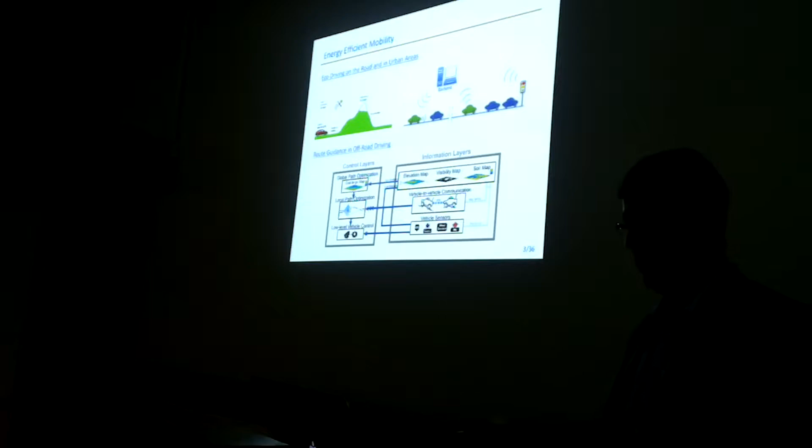But today I'm going to focus mostly on traffic signals and how that information can help us improve energy efficiency of vehicles. Now, this is traffic in LA last year, I think. And if you have the most efficient vehicle automated in that traffic, it's not going to help you. You're going to lose fuel, you're going to be frustrated and lose time. So to improve on energy efficiency, we need to think outside of the car.

We need to think about the system, because even with autonomy, there are some good arguments that say if your car is autonomous, your vehicle miles traveled may increase, the user group may increase, and the congestion problem may be even more. So we need to have the right policies to avoid those kinds of scenarios, and I'm not a policy person. But the other thing we can do is to coordinate the motion of cars with infrastructure and with each other. My focus is energy efficiency, but also to make congestion less. For example, one opportunity that exists is in traffic lights.

The National Traffic Signal Report Card that comes out every once in a while, the 2012 one, gave almost a failing grade to most of the things that are done about traffic lights in the US: management, traffic signal operations, signal timing practices, and traffic monitoring and data collection got an F grade. So we have a lot of room for improvement. Delays at traffic signals add 5 to 10% to all traffic delay, or 295 million vehicle hours of delay, according to the reference that was on the previous page. And the benefit to cost ratio of traffic signal management exceeds 40 to 1.

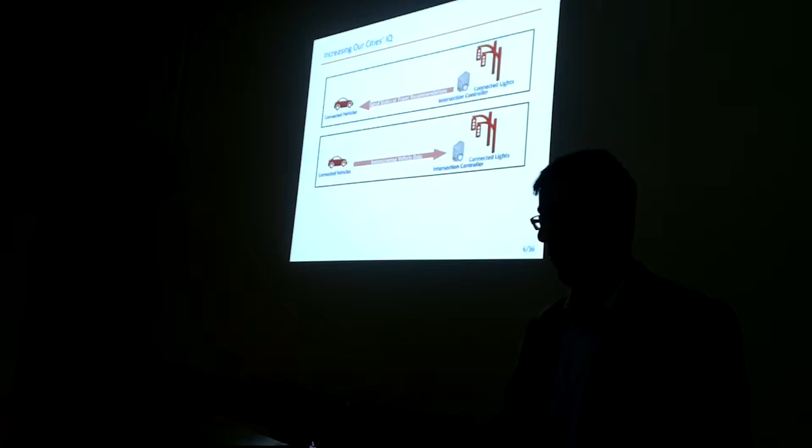So with that in mind, over the past few years, we have looked at transmitting information about the signal phase and timing to connected cars to help them drive more energy efficiently. We've also looked at how information from connected cars sent to the traffic signal or the traffic management system can help us improve the flow of traffic. Ideally, when there's two-way communication, you can do even better. And in a very ideal scenario where all cars are autonomous, very futuristically, you may not even need traffic lights. The first and the third topic I'm going to talk about today.

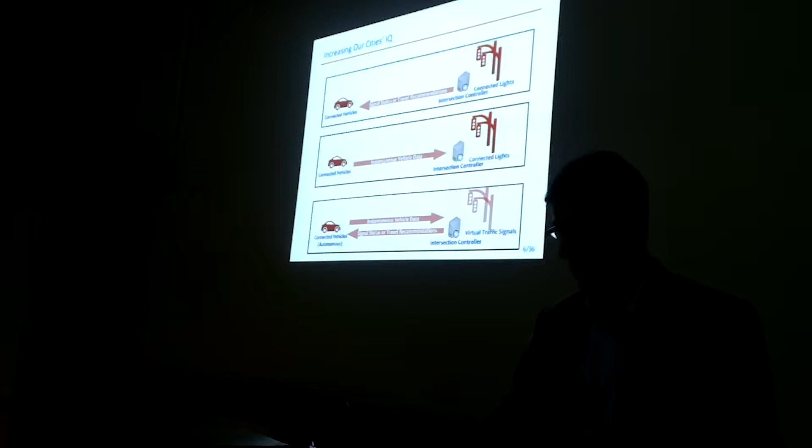So back in 2008 or 9, I had a master's student who was going to write a thesis, and I was trying to come up with a simple problem that I could solve in 1 year. And I didn't know that it's going to continue to become one of my core research areas.

And that was, I told the student, let's say you're going down the street, and there are 3 traffic lights. And you know where the traffic lights are, and you know when they're going to be red and green. So the x-axis is time. So as a function of time, we know when these lights are going to be red and green. We know that idling behind the light is not good for energy efficiency, so we want to find a trajectory that minimizes your idling times.

Now, this could be a simple rule-based approach if you just look at the first light ahead of you. If you look at multiple lights, you can get a better solution if you use an optimization-based approach or an optimal control approach. And the idea was to find this trajectory.

Now, I know it's Friday evening, and you're probably tired, but let's go and do some quizzes, okay?

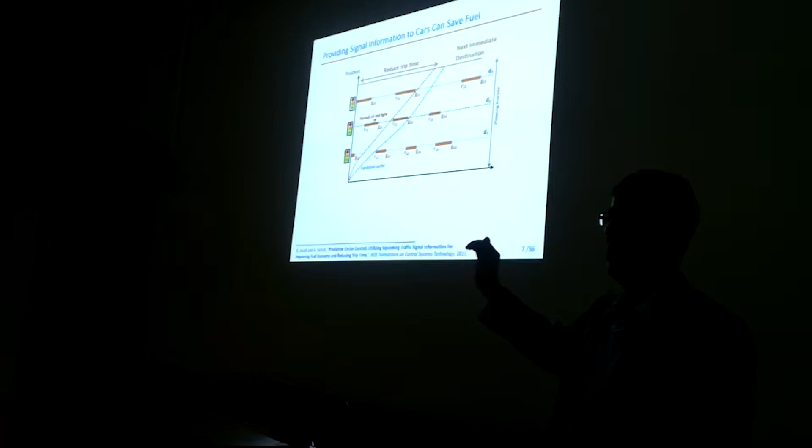So, let's say you have a light in front of you, like 200 meters ahead, and you know it's going to turn green in 20 seconds. If you want to be energy optimal, how do you drive toward that light? What's the best strategy? Do you go smoothly? Do you accelerate? Do you decelerate? Do you coast? What do you do? Look for optimum velocity. Seek out optimum velocity. Find optimal velocity. Slow down and speed up.

Yes, if you can find a velocity that gets you to the green, of course you have to speed up or slow down to that speed, but then it gets you to the green, that's the best. Maybe also I break it down a little bit. Let's forget about traffic signals for a while. Let's say we want to go from point A to B with a car. Let's not worry about the powertrain role right here. The engine could be a combustion engine or electric cars. Let's not worry about that side.

Let's say we have some energy at the vehicle and we want to spend it optimally. Let's say my velocity is 0 and I want to reach a stop sign and reach a velocity of 0. What's the best way to do that? What's the energy optimal way to do that? Do you accelerate as hard as possible? You slow down until everything's right. But if your velocity is 0 in the beginning, you have to accelerate.

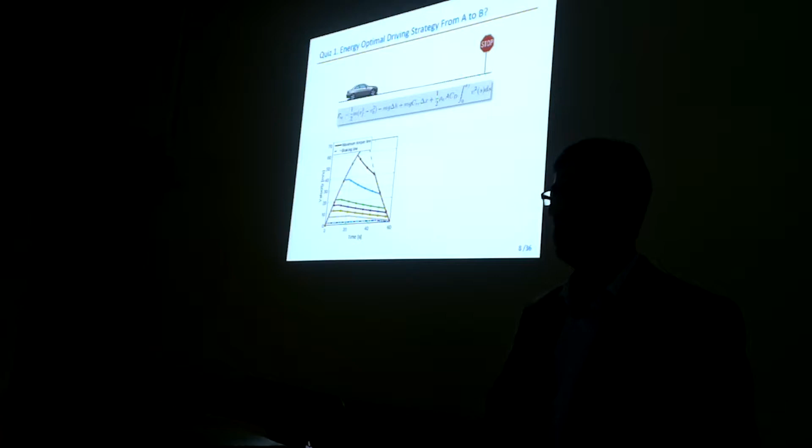So depending on the situation, you may have maximal acceleration, constant speed, coasting, and maximal braking, which is not completely intuitive. And this applies to a vehicle, to a train, or to a UAV, okay? Because all of them deal with drag. This is only to minimize drag. I didn't consider the role of powertrain. A driver that does not do this, goes with constant speed and does not take advantage of coasting, can increase its energy use by 25% depending on what distance is covered. So this can be significant.

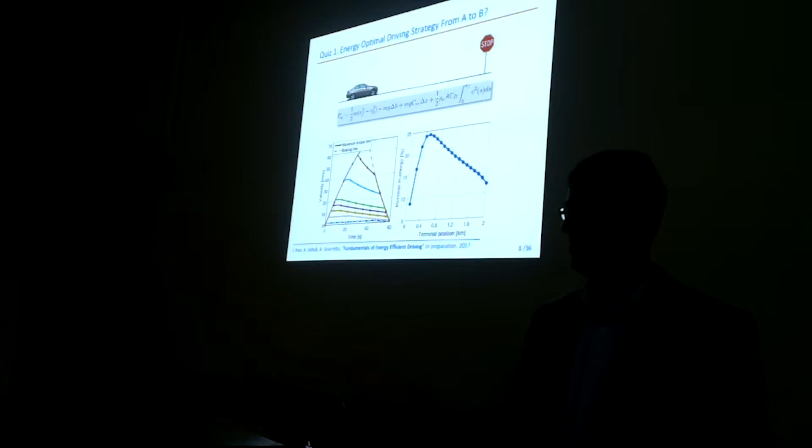That's quiz 1. Now let's try quiz 2. Let's hear more answers, okay? Is there a difference between an electric car and a combustion engine car in the trajectory that you should have when doing this maneuver? Okay, the answer is yes.

For electric cars, because the cost is a quadratic function of the control input, your Hamiltonian would be a quadratic function of the control input. So velocity ends up being a parabolic function of time. If you don't have constraints; if you have constraints, it becomes more complex. I won't go into that. This is the work of my collaborator. Over the summer, I was in France. I was working with these fantastic guys, Ji-Hoon Han and Antonio Sciarretta, on the same problem, fundamentals of energy efficient driving.

But on the conventional car, even when you go constant cruising, it's best, according to optimal control and common sense, because of the way the engines are, to pulse and glide. Meaning to turn the engine on, because the engine at medium loads is not the most efficient. You want to operate it at high power and then turn the engine off and repeat this process. Ideally, infinitely fast. So we want to do pulse and glide very fast. It's called chattering control in the flight control literature that I found from many years ago.

But you want to turn the engine on and off. And I know this is not very comfortable. This is disruptive to traffic. That's why we don't do it. But if you want to do fuel optimal, that's the right way of doing things. And the period should be very, very fast, but because it's not practical, we can have a finite period, like maybe 30 seconds or 60 seconds. That results in, as you see in the top plot, variations in velocity. But that we know, as I said before, is not good for drag, because variance in velocity is not good. So there is a trade-off, okay? You can do pulse and glide, but you have to have aerodynamic drag in mind.

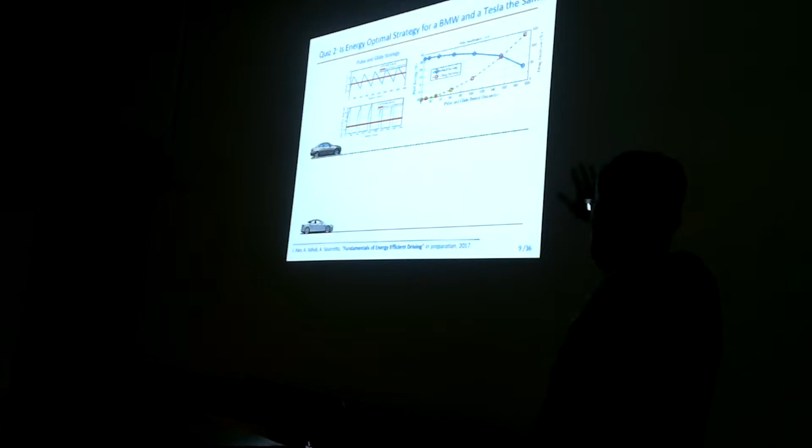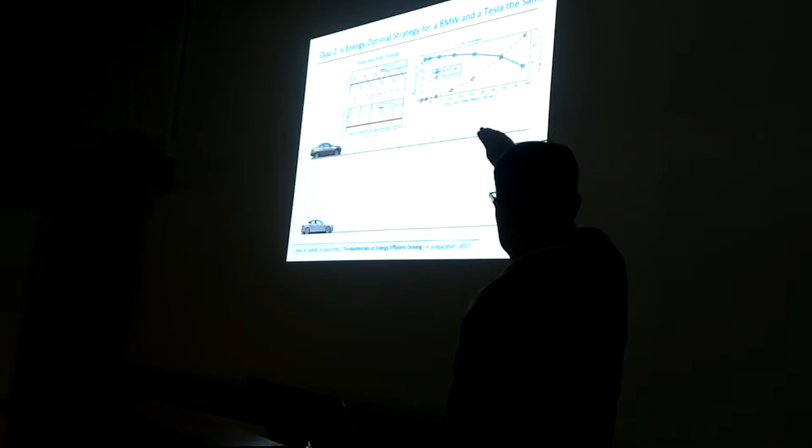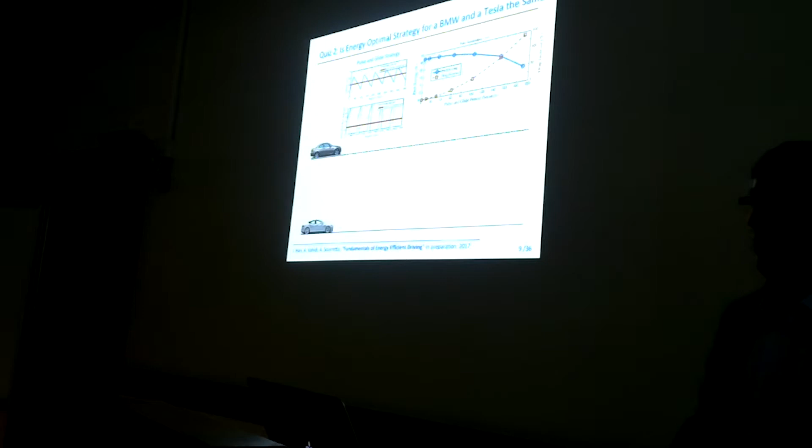Here I'm showing for going at a city speed of like 15 meters per second. The period of pulse and glide, as I increase it, the fuel efficiency gain drops, but it could be as high as 30%. At 60 seconds period, you even have 30%. As you increase that, the effective drag increases, and then that benefit dies away. We haven't done an experiment on this, but we have done the optimal control. And you don't even have to do optimal control. You can just reason, as I said. Okay? So that's the fuel optimal approach.

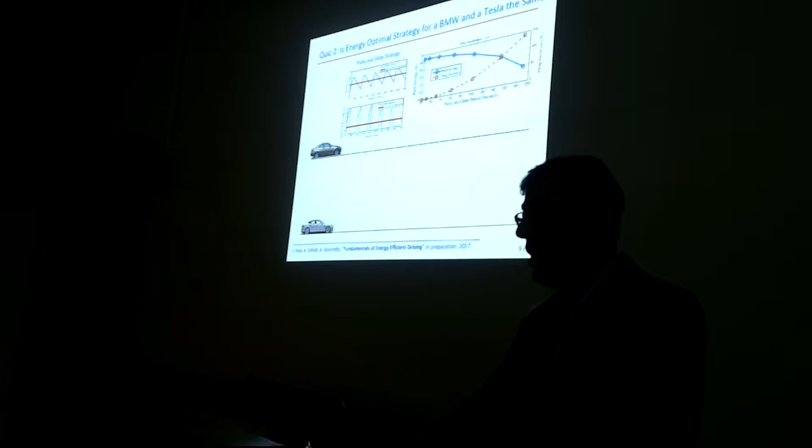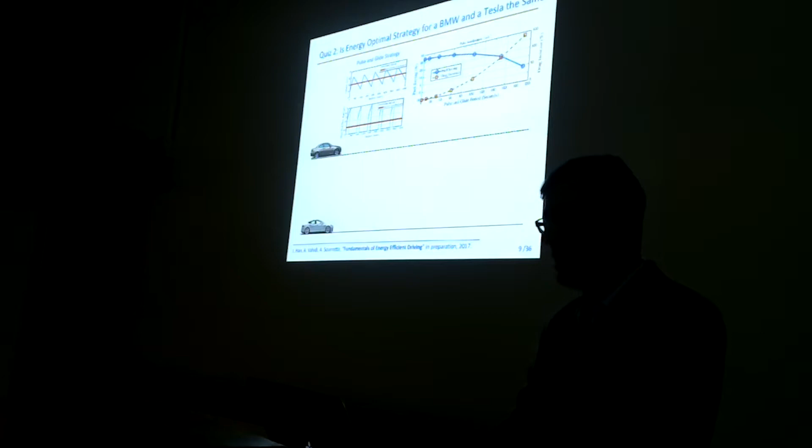But in the rest of this talk, for the reason that we want to have comfortable rides and not be disruptive to traffic, I won't follow this approach. So my approach would be suboptimal. Okay? So in a traffic signal problem, the cost function that I use is a suboptimal approach. The cost function penalizes, so we discretize the distance and penalize the travel times, scaled by some minimum travel time. We penalize the acceleration to have a smooth ride. Also, penalizing acceleration will discourage use of brakes, so that's good for fuel efficiency.

And the last term, basically epsilon is a small number. So 1 over epsilon is a large number. C is a number that is either 0 or 1. When there is no light, it's 0. At the location of the traffic light, and when the light is red, that C is 1. So you have a large cost that penalizes your stopping at the location and time of the red signal.

Sometimes we may not have deterministic knowledge about the time of the light. So we may know the probability of green. So then we formulated a stochastic cost function, but in the last term, instead of 1 over epsilon, we have log of probability of green. So if probability of green is 1, log of 1 is 0, the last term drops. If probability of green is 0, meaning the light is 100% red, you have an infinite term at the end, which discourages stopping at a red signal again. Okay? So that's the idea.

So first we started with simulations in 2009. This is in our local city, Greenville, South Carolina. We obtained traffic signal timing for fixed signals along the road, 10 of them. And we simulated a baseline car that drives like we do. At that time, we called it a PCC car, predictive cruise control car, that had access to the timing of the lights. And we tried to minimize the idling intervals.

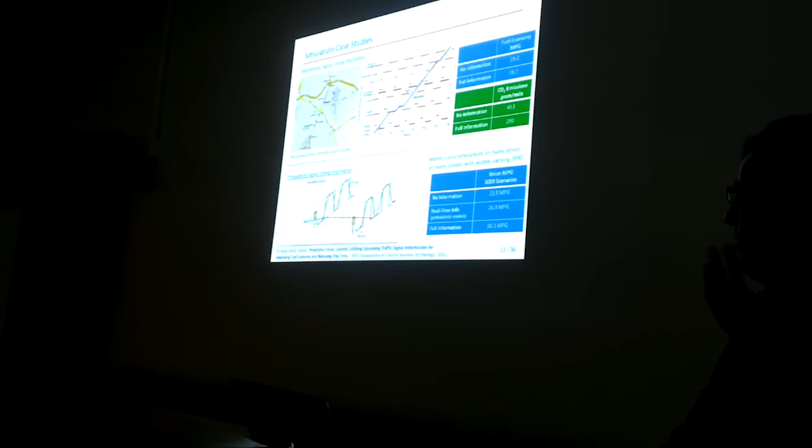To cover many scenarios, we also did a Monte Carlo simulation, also considering probabilistic information of the light. That was a case study only. Running 3,000 simulations with different initial conditions, going through, I don't remember, it was 3 or 10 lights. With no information, we did 23 miles per gallon, with full information, 30 miles per gallon, and with probabilistic real-time information, 26 or 27 miles per gallon. So the numbers were encouraging.

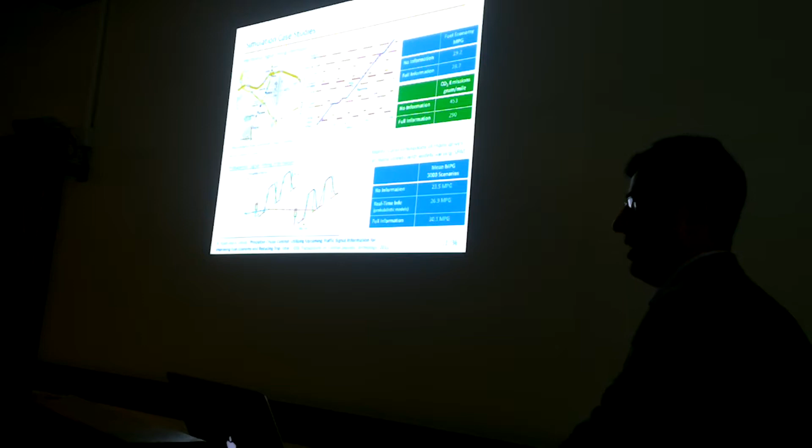So in 2012, when I was on sabbatical here at Berkeley, I also worked with BMW Technology Office to bring this technology into the vehicle. BMW had access to traffic signal timings from the traffic control center in the city of San Jose for the 1,000 traffic lights that are in there. So we defined a loop that goes through 10 lights, and we did testing in mixed traffic using a BMW 5 Series. Here I'm showing the results for 4 BMW drivers that were driving these vehicles. We couldn't add drivers from outside; company policy wouldn't let us.

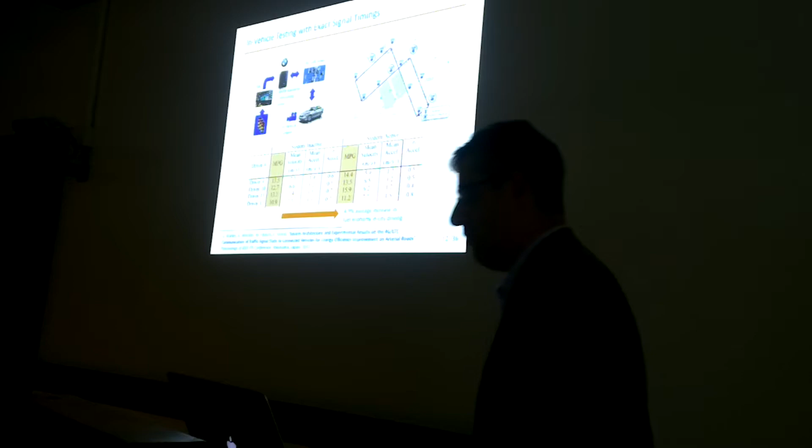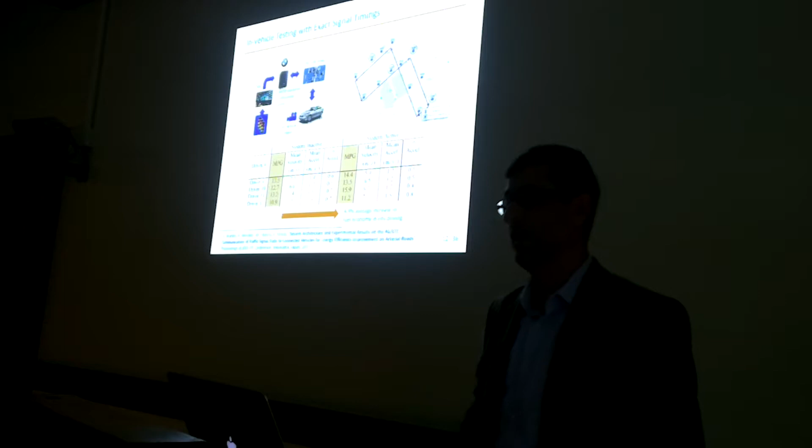The drivers had 1 hour driving with the system inactive and 1 hour with the system being active. On average, the improvement in mixed traffic was 9%. And 9% is a big deal for our auto industry. For every 1% improvement in energy efficiency, they're ready to add $100 to the price tag of their cars. So if your 9% is consistent, this is only in a city, it's not going to be 9% everywhere. But with 9%, you can add $900 to the price tag of your car. Okay? Let's see the system in action.

This was actually in San Francisco on Van Ness Avenue. So the driver is shown a spectrum, green and red. If you keep the speed in green, you go through a green light. In the front panel, it shows a countdown to the next light. Basically, as you approach a light, the vehicle subscribes to that light and starts receiving information about the timing of that light. And it shows the speed advisory to the driver.

Also, there's a camera that detects if there are cars in front. My student decided that if there's a car in front waiting, he disables the advisory system, because he's trying to graduate and wanted to make it simple. But you can use the camera information in other ways as well. So again, you can see this situation here. It first gives the speed advisory, but I think that stopped vehicle disables the advisory. Now, one more thing I want you to notice here.

While in San Jose, the timings that we would broadcast to the driver are perfect, in San Francisco, they're not. As you can see, sometimes there's 1 or 2 seconds difference between when I say the light is green and when the light turns green. The reason was that in San Francisco, we didn't have access to the traffic control center timings. I mean, we had timing cards for the lights; we know that on Van Ness, at that time, they're fixed time. But the signal clock would drift during the day, so we could not rely only on the timing cards.

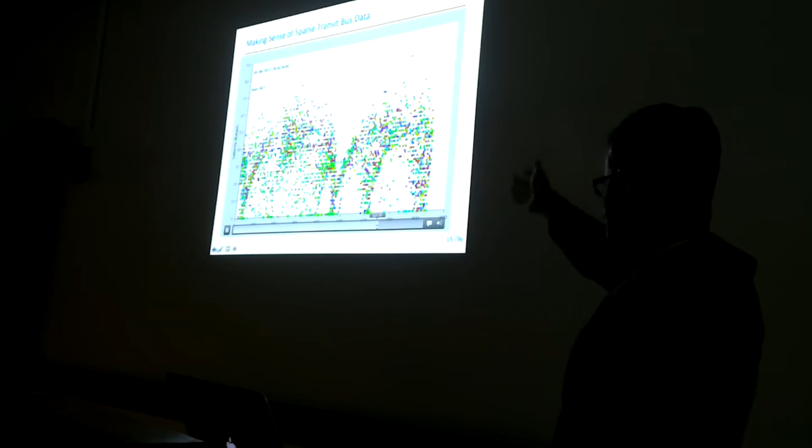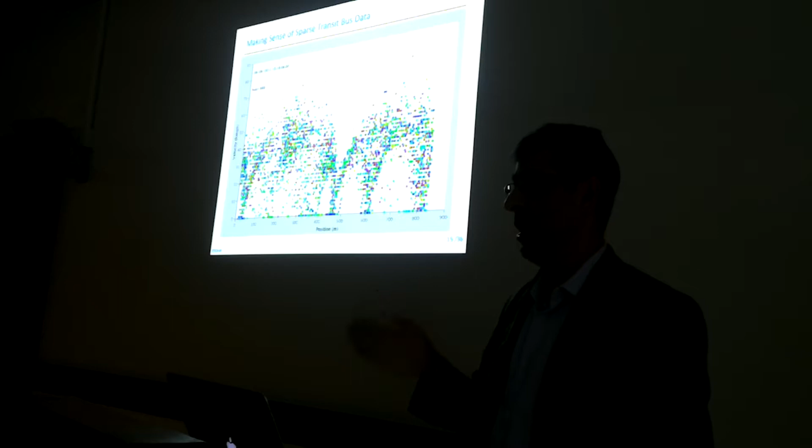But then we thought, okay, let's try and put things together. If more buses go by and put the data together, after a few days you can see patterns. And where the buses come to stop, that's an intersection or a bus stop. And we use very simple heuristic methods to try to estimate the red time, the green time, the cycle time, and more about these traffic lights. Notice that these traffic lights are fixed time, so they're not adaptive. Okay, so there's some hope here.

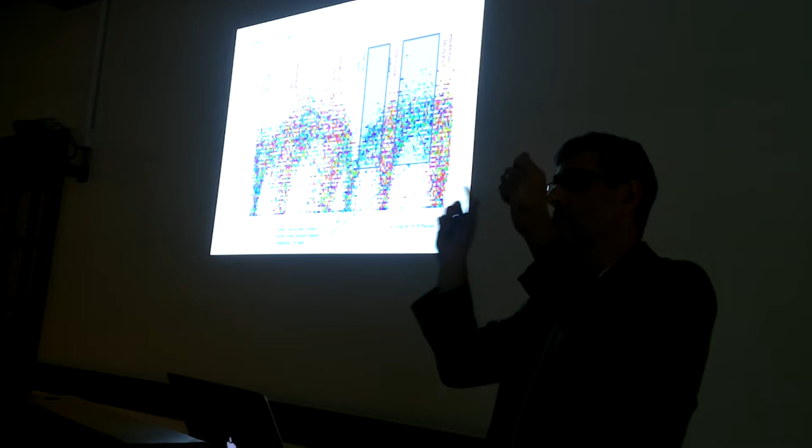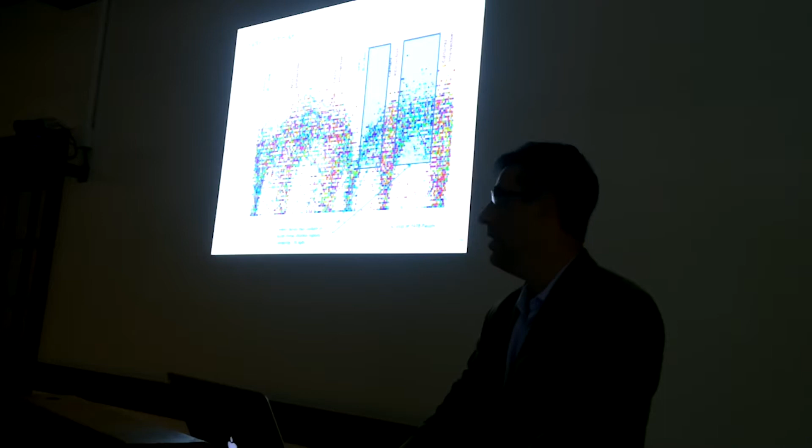So for example, this was not on Van Ness, this was a different street, but just for demo. We look at an intersection, and we look at a box right before and right after the intersection, and selected buses that send an update in these boxes. So we had timestamps for those buses. There are not many, by the way. And then we subtract the time, and if that is not consistent with the velocity of the bus, that is longer than what the bus would go with the recorded velocity, we infer that the bus probably stopped at the intersection for a while.

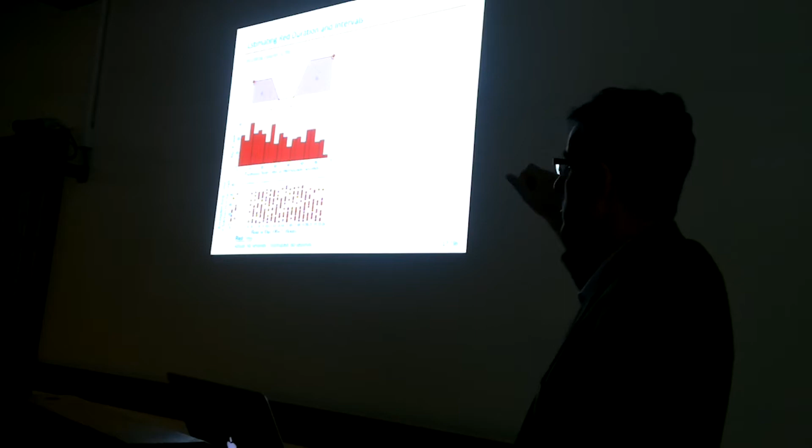And we projected that the profile was like that. Initial velocity went with constant speed, decelerated with an average deceleration that we crowdsourced also, stopped for a while, accelerated to reach the final speed that we were reading. And then we inferred how long the bus was stopped. We did a histogram over 2 weeks or a month, and the maximum in this histogram is like 65 seconds.

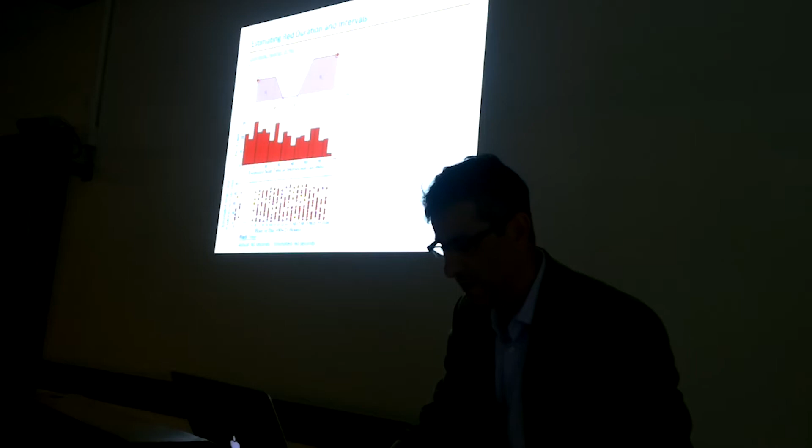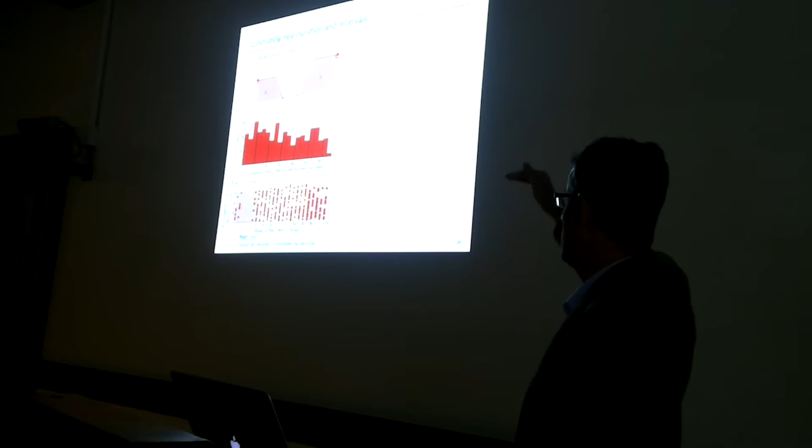Even better, we could look at different times of the day and look particularly at early hours, midnight to 5 a.m. and 18 on, when there's less traffic on the road, and as you see, the maximums there are 60 seconds. The red interval for this signal was 60 seconds. And for most signals, we were able to consistently do that, get the red times.

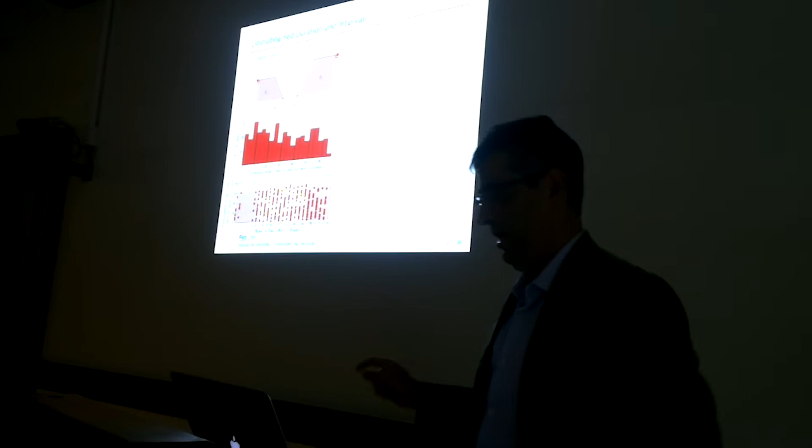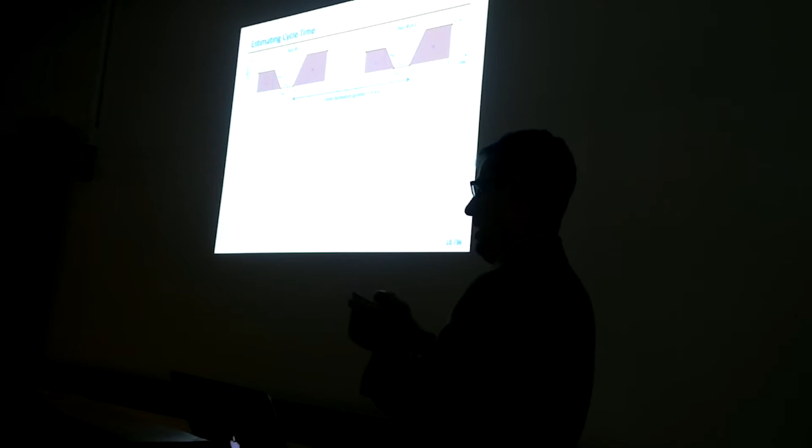Another challenge is cycle times. So we looked at 2 buses that came, and they could be 1 hour or 2 hours apart. But what we said, if they stop, their starting point when they start moving, if you subtract that from each other, it should be an integer multiple of cycle times, assuming fixed cycle times, which was the case here. And so we tried different cycle times and obtained the cycle time that gives us minimum remainder when we do the division. So this is a brute force approach, trying cycle times of 1 second, 2 seconds, all the way to 150 seconds.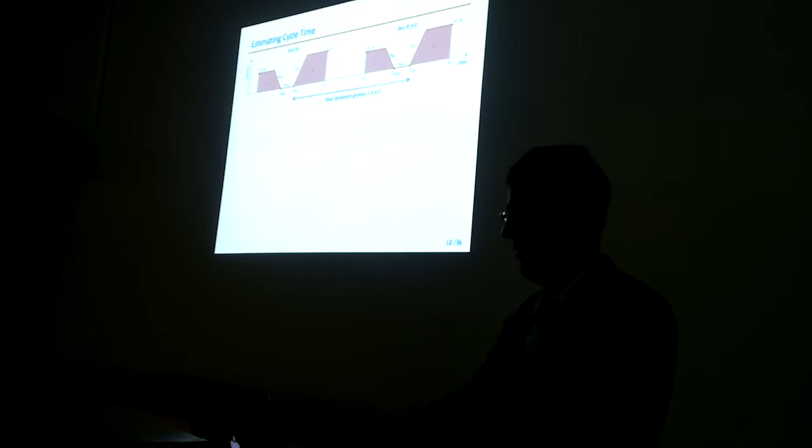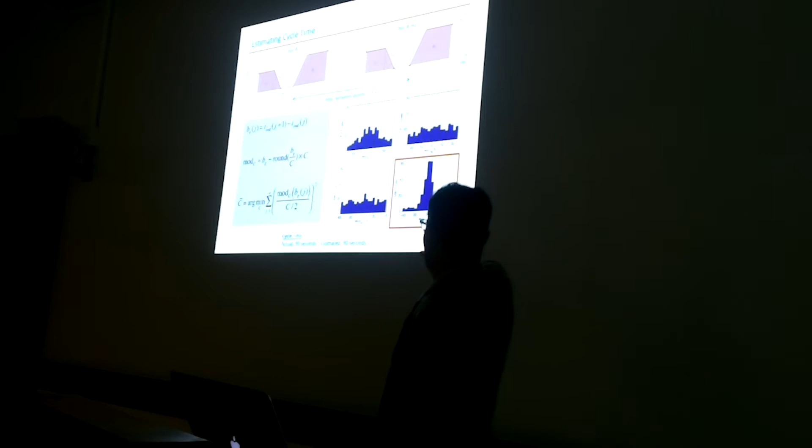And this is the model I use. I don't get into it. For example, these are 4 examples you probably cannot see. We plot the histogram of the remainder of division by candidate cycle times, and here 90 seconds will give us the most centered around 0. So we thought that the cycle time of this light is 90 seconds, and it exactly was 90 seconds.

So we did this for a couple of lights on Van Ness Avenue, Lombard, Filbert, Green, Broadway, and Washington intersection. And for cycle times, we were almost always right on, except for one case, in which we got half of the value. And for red times, most of the times we were successful. My student Ali, who worked on this, later improved this by considering queue length and where the bus is in the queue, and improved this even further in a follow-up publication. He had better results. I have the old results here.

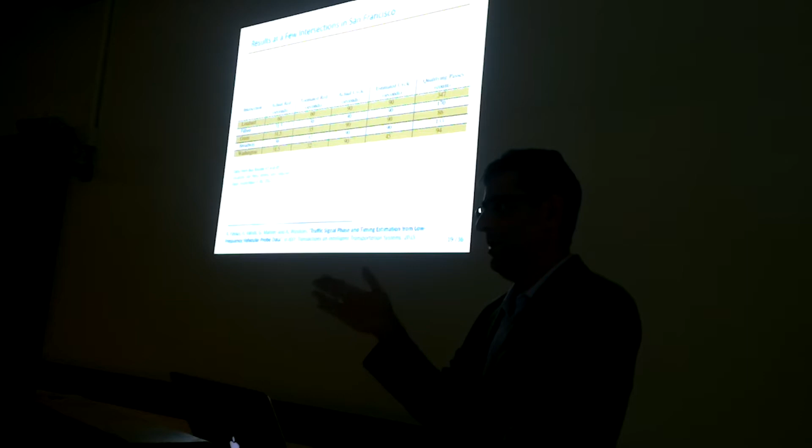We were able to do more. For example, on that same street, the offset between the traffic lights changes at 6 a.m., 10 a.m., 3 p.m., and 7 p.m.

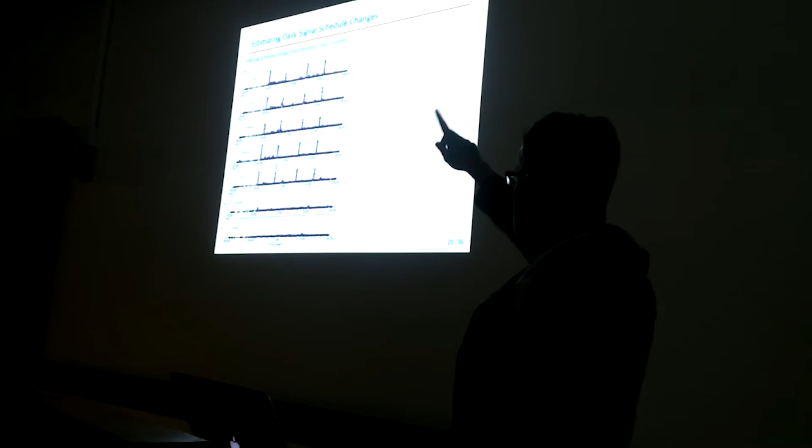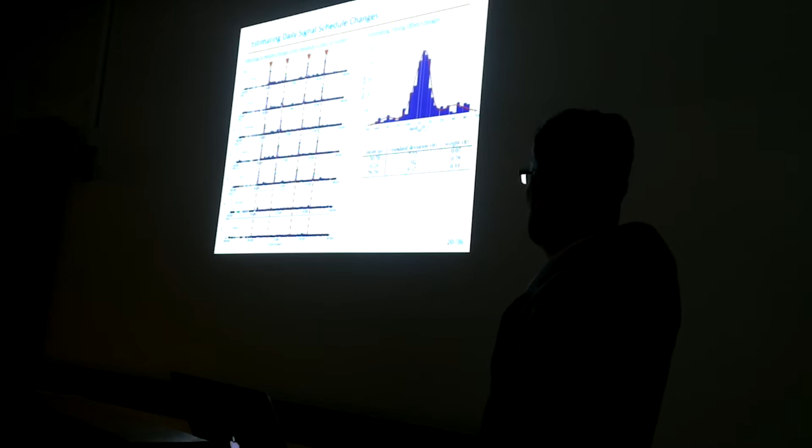We looked at variance of our prediction of start of green, and that only happens on weekdays, not weekends. You see there's a spike there that correlates exactly to where the offset change happens. So we were able to detect the offset change, and also the amount of offset change, using a Gaussian mixture model, and seeing what those bumps are, 30 seconds, and that was the offset. The details are in that paper. I don't want to bore you with that.

My student Ali was very good. We spent a lot of time on Van Ness Avenue. There's a bar around the corner. We sat and looked at the actual timing of the light and clicked on our computer to record it for like half of a day.

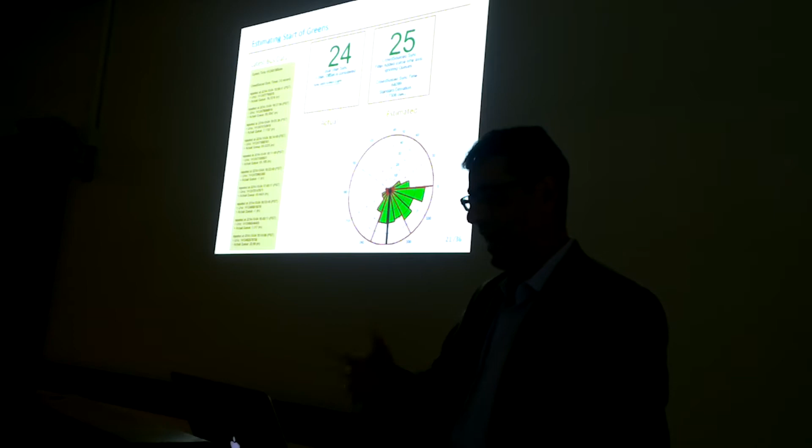And that's the actual timing and the estimated timing. And so we developed this web interface that showed the estimated versus the actual. On the left, it shows the last buses that passed and their position in the queue whenever it could be inferred. And this green is from the histogram of passages through green. I don't want to get into it. So he developed this interface, and we could monitor how well our system is doing.

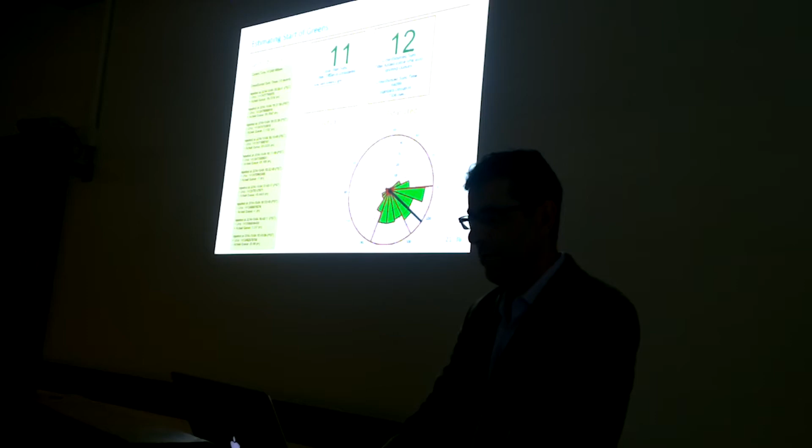Where could this be useful? This happened in San Francisco last year, where an Uber autonomous car passed a red light, almost hitting a pedestrian. If Uber had a system like this in place, probably this could have been avoided. I mean, that's my marketing.

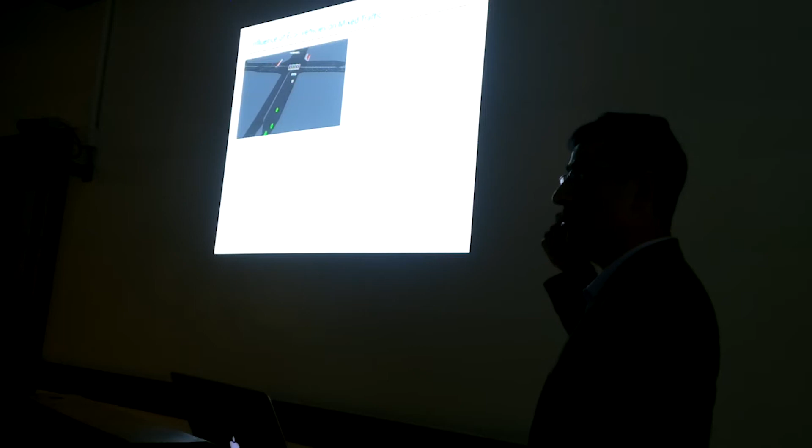And whenever I show this research, people also ask, if you give traffic signal advisory to vehicles, what is the impact on other vehicles? So we did some simulations in Paramics, which is a traffic micro-simulation tool. Here the white cars are regular cars. Green cars are programmed to receive the timing of the lights and choose a speed to go through green. And we estimated their fuel consumption by passing their velocity trajectory to a simple model. Okay? Not very sophisticated.

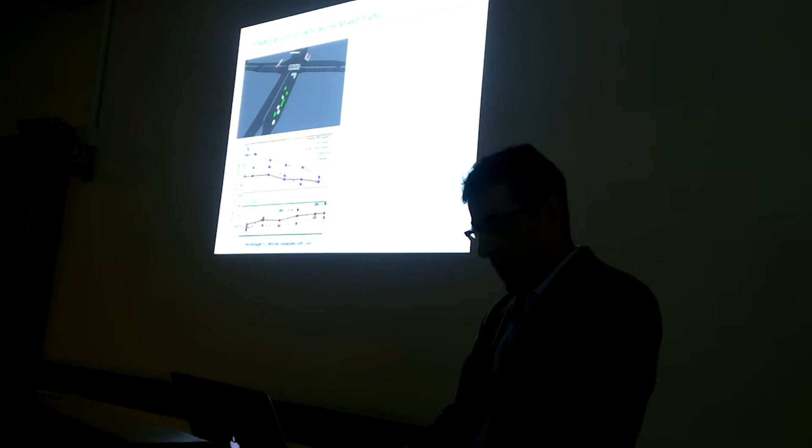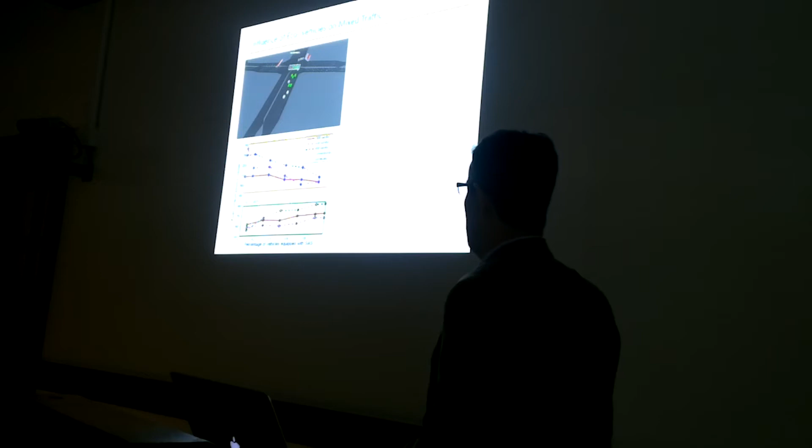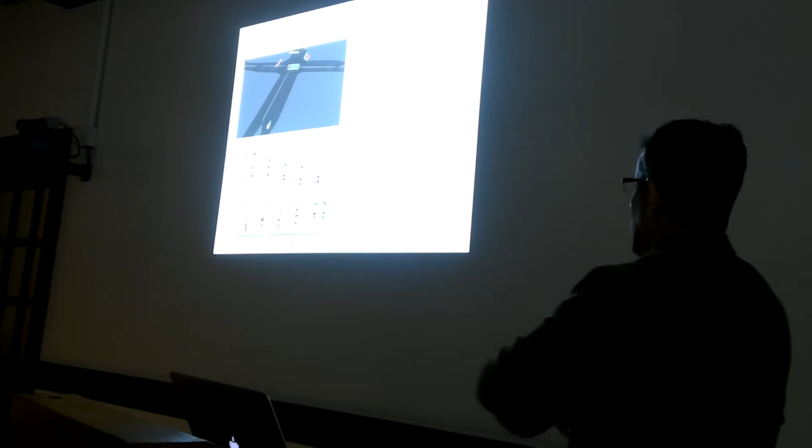Here's the result for fuel consumption. So the x-axis is penetration of vehicles equipped with speed advisory system, or connected vehicles, from 0% to 100%. And the vertical axis is fuel consumption in milliliters. And so you can see that equipped vehicles have lower fuel consumption than conventional vehicles.

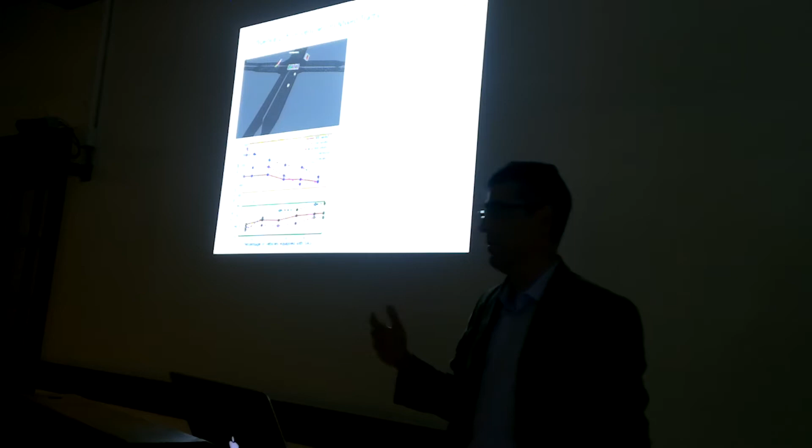But the interesting trend here is that as the percentage of the vehicles equipped with speed advisory system increases, the fuel consumption of regular vehicles improves because they get trapped behind these vehicles. Now, you see different results for different vehicles per hour per lane, and those are different, but the trend here is interesting.

We also looked at traffic flow by putting sensors in the software and measuring it across 4 intersections. And traffic flow was slightly negatively influenced, so it went from 100% to 95%. And the travel times slightly increased depending on the penetration level between conventional and connected vehicles.

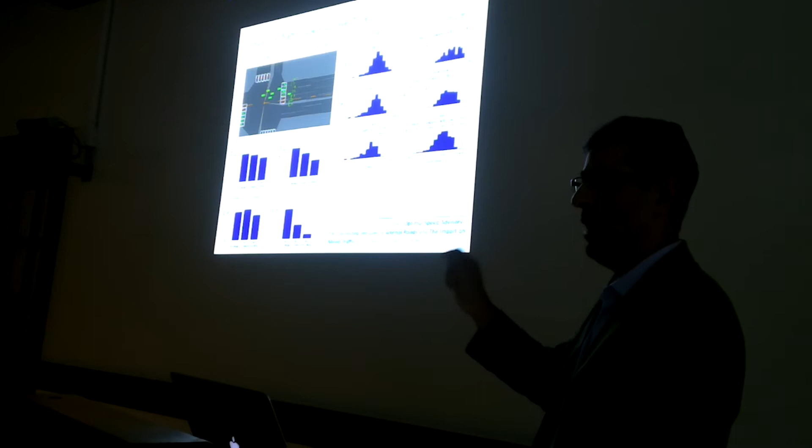Now I know Pravin has a paper that says if you platoon these vehicles together, you get better results, you increase signalized intersection throughput. Here we're not doing platooning; the algorithm was very, very vehicle-centric and not collaborating with others. So we got improvement in fuel efficiency, but flow and travel time were slightly affected, to a degree I think that can be tolerated.

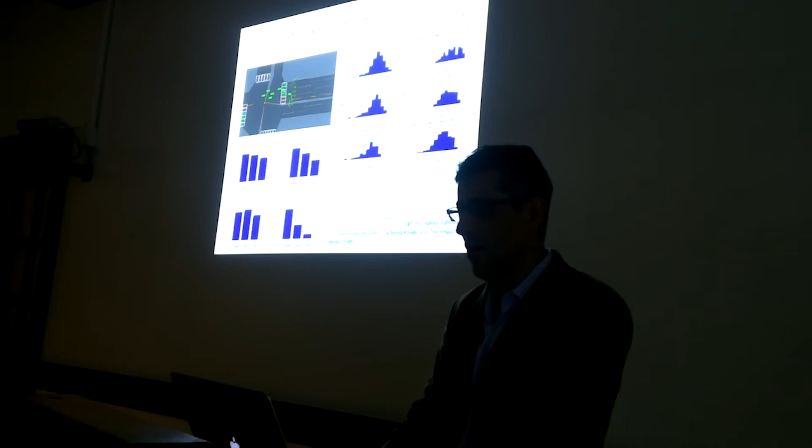More recently, we're looking at a similar problem, a little bit more challenging, of car following. Today, we follow the car that is in front of us very reactively. If the car slams on the brakes, we do that. Lane selection is also very ad hoc. We don't have a lot of information about what's happening in the adjacent lane because we don't know what's happening downstream. So we change lanes kind of arbitrarily.

The point is that with connectivity, you can have more information, and if you can anticipate how the car in front of us is going to drive, if you have information about that car a few seconds in advance, knowing that this driver is aggressive, and also if you look at the traffic context, and we fuse this data and predict over the next 10-second prediction horizon how this car is going to move, you can probably reduce the braking events and improve our energy efficiency. The same for lane selection.

And that's something we have started to do. This paper has some early results. It's still shallow. We want to go deeper. We recently got a DOE grant to look at exactly the same problem, to come up with the algorithms for car following and lane selection, and then test them in a micro-simulation environment, and then do experiments over a 2-year period.

Now, a little bit more to the future, more fun stuff, maybe not realistic stuff at this moment. What about the future where all cars are autonomous? Do we need traffic lights? Now, there was this paper out of UT Austin, Peter Stone's group in 2008 that showed that the cars can be treated as an agent, all autonomous, no intersection controller, no traffic light is needed.

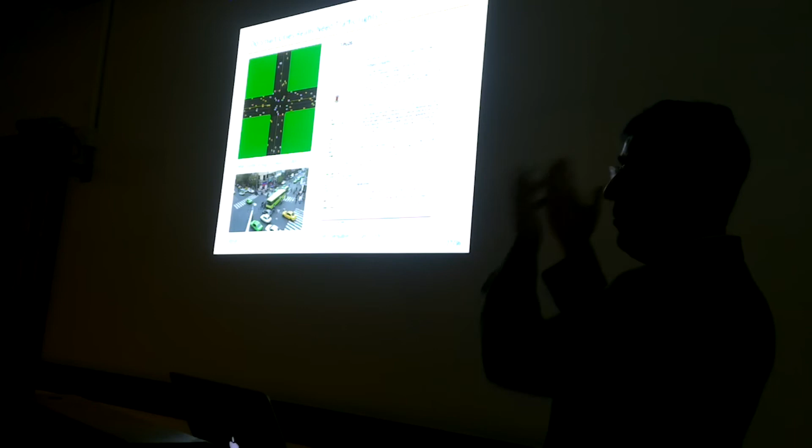The cars can just go to the intersection like that. And it got a lot of traction because of that. I didn't believe it at that time. I still don't think this is feasible, but this was a fun thing that we wanted to formalize a little bit more. And down there, you see, actually, that could be feasible. That's Tehran, where I am from, and the light is not working very well, and people managed. And actually, it's more efficient, you know?

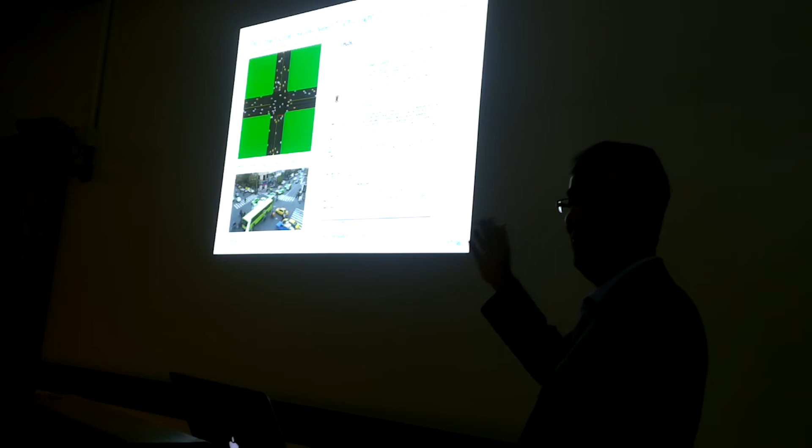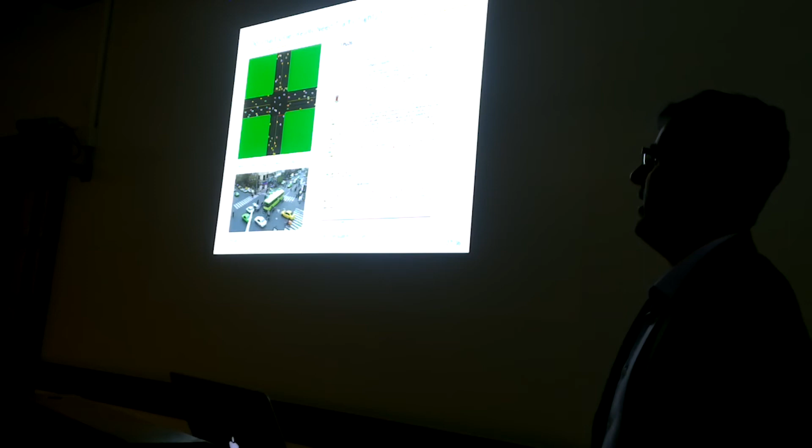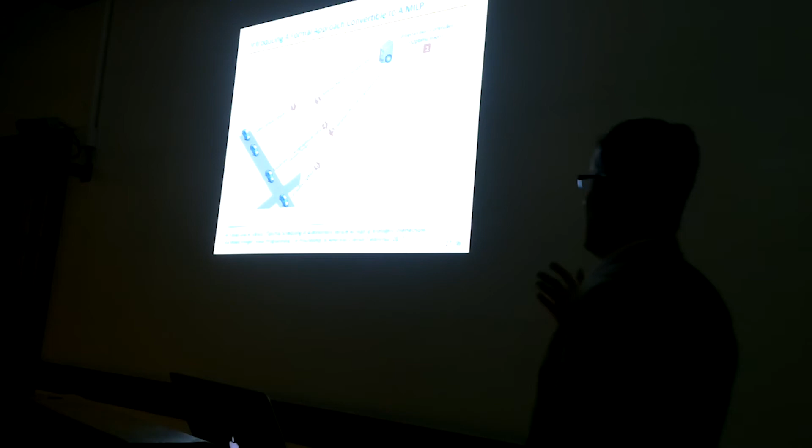And there was this paper that probably you cannot see very well, the resolution is not high, from MIT in 2016 that talked about this idea again, and they did simulations to show some benefits, but there was no optimization involved. So we tried to basically do some form of optimization that is convertible. We were able to convert it to a mixed integer linear program.

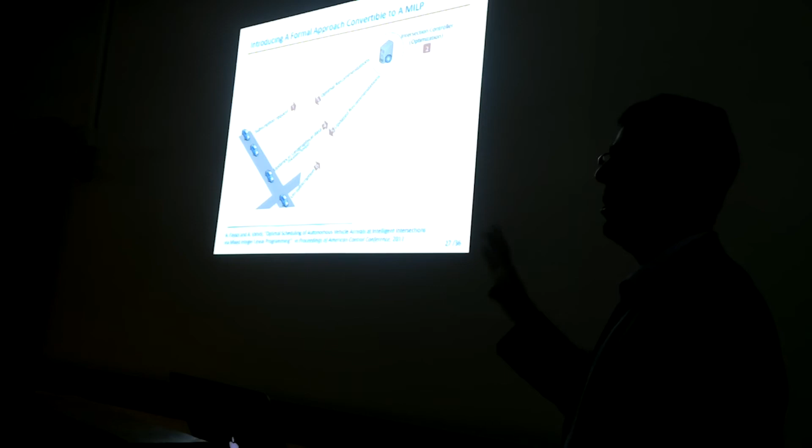So the idea is that each vehicle that approaches the intersection, all vehicles, sends a subscription request to a server that sits somewhere near the intersection or remotely, just like the car that I showed you subscribe. The server collects all this information and then solves an optimization problem and gives each vehicle an access time to the intersection.

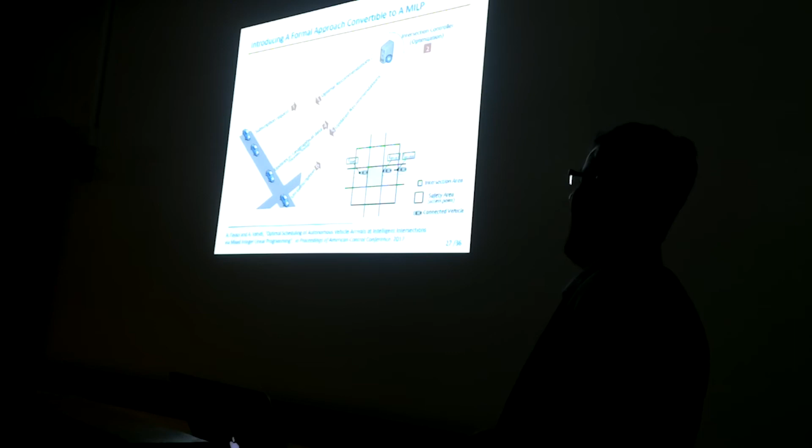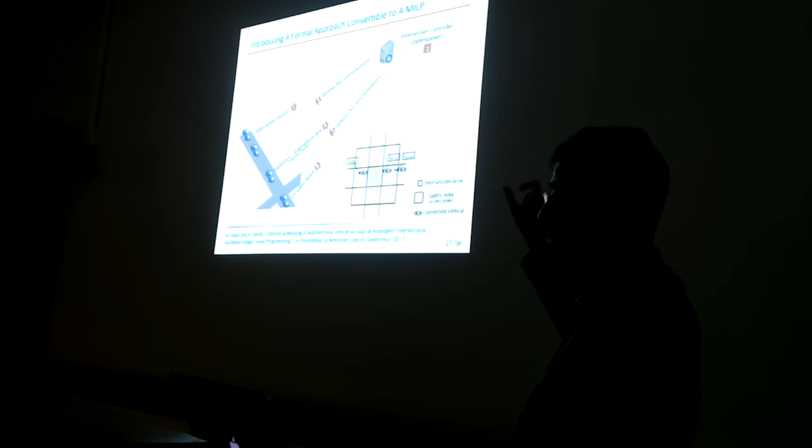And to ensure safety, if the intersection is a shaded area, we consider the bigger square, the size of which depends on the speed limits; the higher the speed limit, the square grows. And we give each vehicle access time to the edge of this bigger square. So if the vehicle for some reason gets there and does not follow the recommendation, it still has the opportunity to stop if another vehicle from the opposing direction is in the intersection. So there's enough stopping distance built into the system, okay?

Now the objective, we want to minimize the largest access time. So the optimization variables are access times given to each vehicle. We want to minimize the largest access time among the n subscribed vehicles. So if you have 50 vehicles that subscribe, you're assigning 50 access times. The largest of this we want to minimize. So it's a min-max problem.

But we also consider something, we don't want to be a dictator. We want it to be a little bit democratic. So we allow the vehicle to send to the intersection a desired access time based on their current speed. And the second part of the cost function also penalizes the deviation between assigned access time and the desired access time. And while in this current form it's not a linear program, by defining new variables, this problem is easily converted to a linear program. Okay, I won't go into those details, it's published.

And on the constraint side, for the vehicles that are on the same movement, we said the access time between the two vehicles should be more than a gap. First, we chose 1 second, but now we have a gap constraint that is dependent on the velocity of the vehicles, but still not very large because the vehicles can follow each other pretty closely.

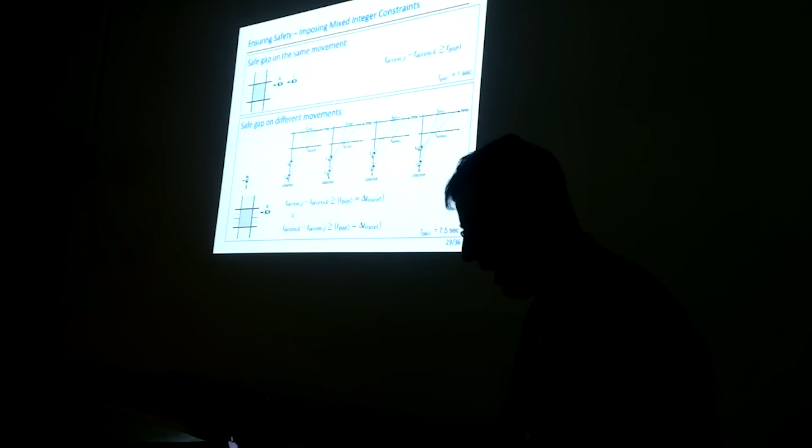For the vehicles that are in the opposing direction, multiple scenarios can happen because we don't assume the first come, first serve idea. We want to optimize everything that's possible. So the access time of vehicle J minus access time of vehicle K should be more than a gap, which is like 7.5 seconds in this case, depending on the speed limit. Or the access time of the vehicle K minus access time of vehicle J should be more than 7.5 seconds.

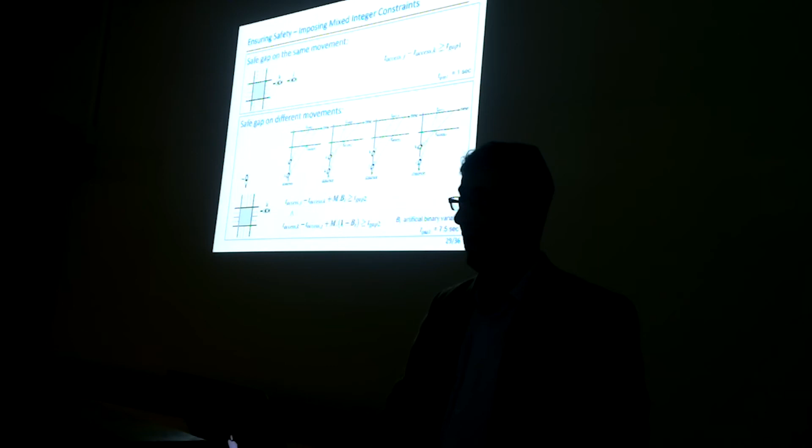Now, this is an OR condition; with a big M method, you can convert it to an AND condition. A binary variable is introduced for each constraint, which makes your linear program a mixed integer linear program. Okay? We also had feasibility in mind, basically saying the access time cannot be faster than what the vehicle can achieve. So we consider the maximum speed the vehicle can go with, the maximum deceleration level of the vehicle and acceleration level, and we consider the access time we assign should be feasible. Still a linear program, mixed integer.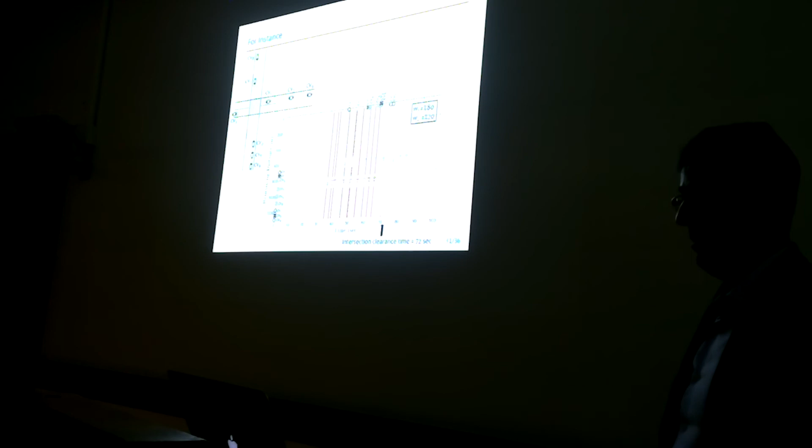Now, MATLAB was not very efficient when we had 50 or more vehicles, so Ali, my student, wrote a Java code and used the IBM CPLEX package to solve this problem. For 50 vehicles, we have 50 optimization variables, 50 slack variables, 616 artificial binary variables, 1,400 constraints, and the execution time was 120 milliseconds, sometimes 800 milliseconds on a laptop or a PC.

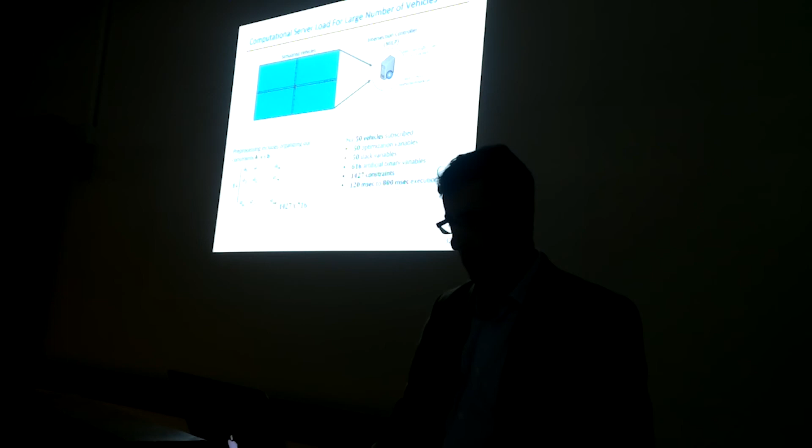Here I'm comparing this scenario versus baseline scenarios A and B. In A, we have a fixed time intersection. In B, we have the same fixed time with the speed advisory. And in C, we don't have a traffic light. The same vehicle flow is injected to all three of them, so we replicate that. And we measured number of stops.

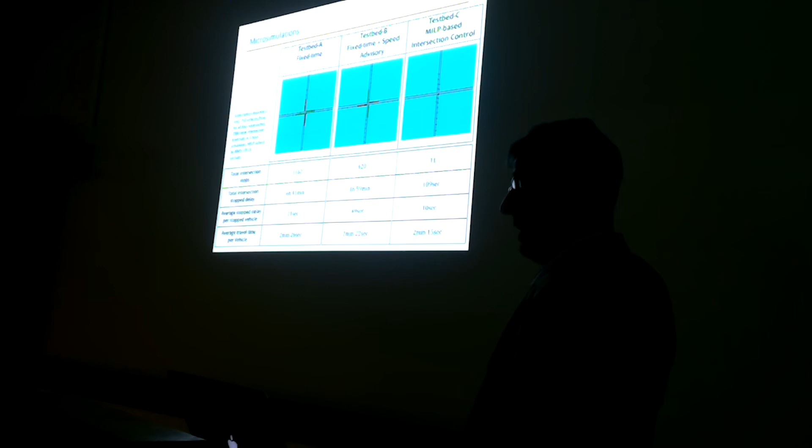The number of stops went from 1,100 to 11 in 1 hour of simulation. The total intersection stop delay went from 6 hours 41 minutes to 109 seconds. The average stop delay, you can see it, and the travel time is slightly improved from 2 minutes 30 seconds per vehicle to 2 minutes 15 seconds.

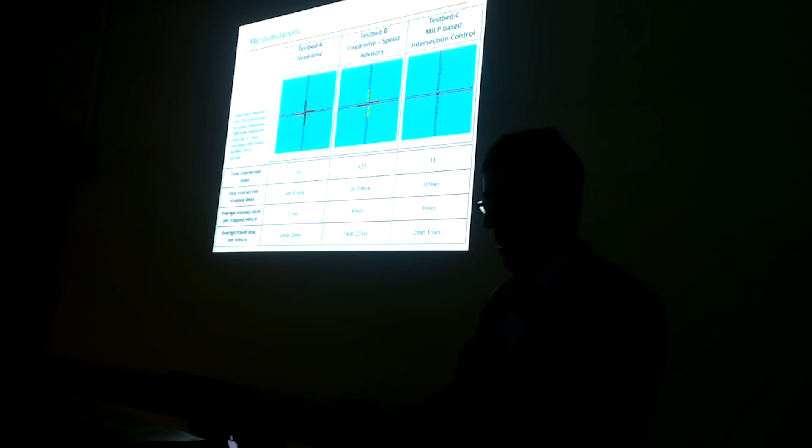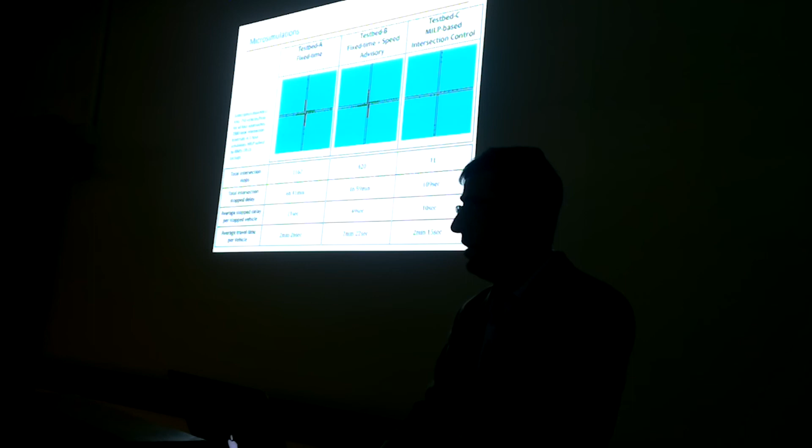Now, this was only simulation. We were interested to do some experiment, and it's difficult to put 50 cars on the road. So our idea was to do a vehicle in the loop simulation where one vehicle or a couple of vehicles interact with this simulation environment. So each of these vehicles, even the simulated vehicles, communicate to the server using cellular communication. They send a subscription message, and every 6 seconds they receive their access time. The access times get updated.

Also the real vehicle. At that time, we didn't have an autonomous vehicle, so my student wrote an iPhone app that gives a very precise speed recommendation to the driver based on the access time it's assigned to. So the app basically is similar to the interface you saw in a BMW vehicle, but the speed advisory is very, very tight. So you can drive the vehicle like an autonomous vehicle very precisely. And that's the benefit of an autonomous one.

We did the testing in an airport track that is not used anymore in Greenville, South Carolina. This is Ali who did most of the work. Basically marked an intersection with cones. The simulator is running in the car, but communicates with a server that was 40 miles away with cellular network. The app is in front, and then also the app communicates with the OBD2 port to measure the fuel that is used wirelessly.

And as you can see, as the vehicle starts to approach that particular intersection, it subscribes to it and receives a recommendation on the speed. It's not subscribed, but as soon as it's subscribed, it shows the speed. And a mixed integer linear program is solved every 6 seconds, and the results are sent to the vehicle and the simulated vehicles.

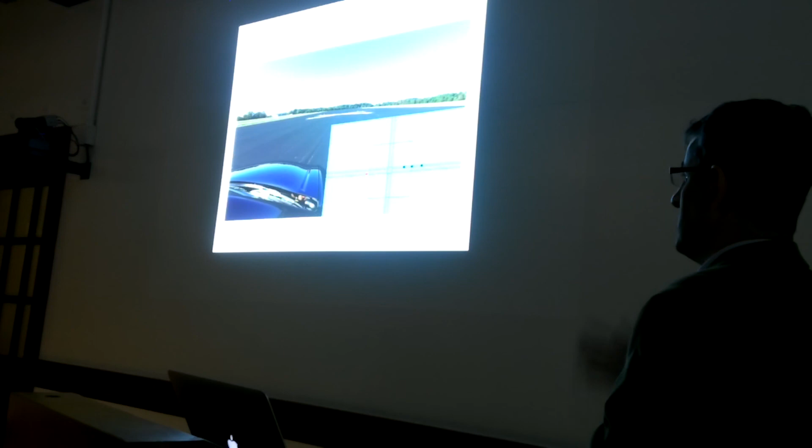And as you can see, the black vehicles are the simulated vehicles. The red dot is this vehicle, the real vehicle. And it's scheduled to pass the intersection. And I was there in the car in the 12 laps that we went. We didn't have to stop even a single time, although the traffic on the other side was significant. We did it also with 2 vehicles for some news coverage, and it worked. I just installed the app on my phone and just went in the car and it worked well.

So this was not autonomous. For our DOE project, I have a collaborator at Clemson who is automating cars, and he has automated a Nissan Leaf. He wants to automate a conventional combustion engine car also. That's his work, and we want to use that in the car following. So we want to do a mix of simulated vehicles and real vehicles in car following, which is much more challenging, but we think we can make it happen.

Of course, you may question about pedestrians and all those kind of things. I agree with you, and that's a scenario you may witness if you have this situation: autonomous cars and not considering pedestrians.